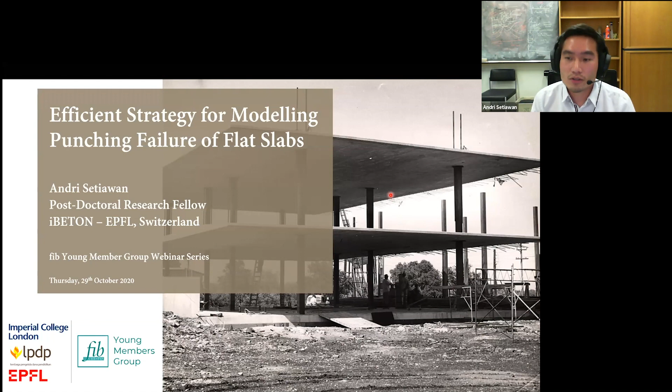The title of the presentation, as Vlad has already mentioned, is Efficient Strategy for Modeling Punching Failure of Flat Slabs. For today's webinar, I've divided the section into several parts. First, I'm going to present the research background in a very general way, and then the research aim, the objective of this research. Then we move on to the state of the art about punching shear itself and about numerical modeling in general. Finally, in the fourth part, we move into the main contribution of my research, related to the proposed modeling strategy.

I also divide them into two parts. The first one is the implementation and verification. The second part will be about the extension of the model to deal with several practical design scenarios. And lastly, the conclusion and future work.

For the background and research aim, I'll take some minutes to cover everything, because I designed the presentation and slides to serve as general information for a general audience who are not familiar with either punching or numerical modeling. So I will spend some time there.

For the research background, I'm going to start with what is a flat slab building and what is the punching shear phenomenon. Flat slab building is a structural system where the floor slabs are directly supported by the columns without the presence of beams or girders.

This kind of structural system is widely used in Europe, especially in countries with low seismicity risk, because it offers many practical advantages, including minimizing the floor-to-floor height since you don't need beams, so you end up with more floors at the same total height. Also, without beams, you get simpler reinforcement installation, which speeds up the construction process, and it gives more freedom for architects to lay out the building. And lastly, faster construction time.

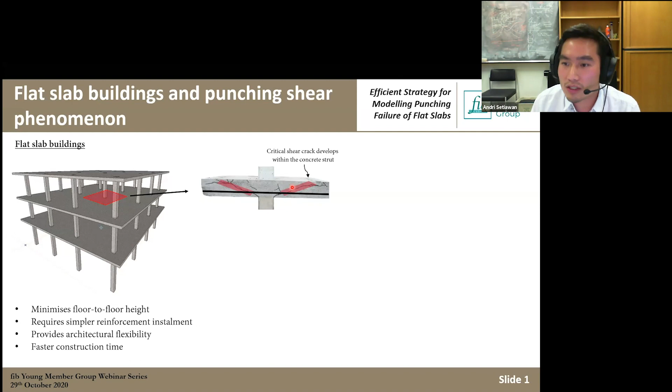In the worst case scenario, found in most typical older flat slab buildings where there is no continuous bottom reinforcement, we can have what is called progressive collapse, where the slab is fully punched through the column. It's a very dangerous failure mode because it happens in a very brittle manner and doesn't give any time for occupants to evacuate the building.

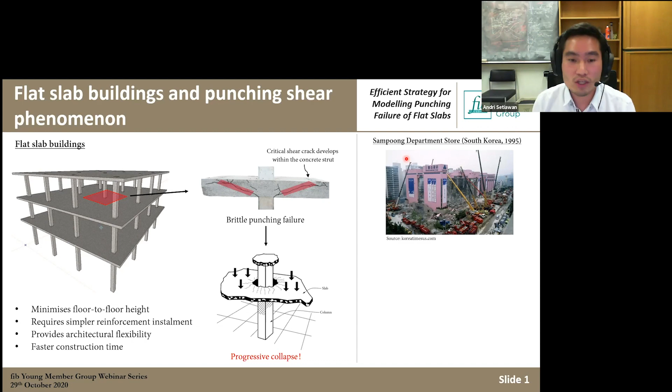We have seen this from previous incidents, like the well-known failure of the Sampoong department store in South Korea in 1995, which was a full collapse. Another example happened during the Northridge earthquake in 1994 in California — this is a picture of Bullock's department store, which partially collapsed during the earthquake.

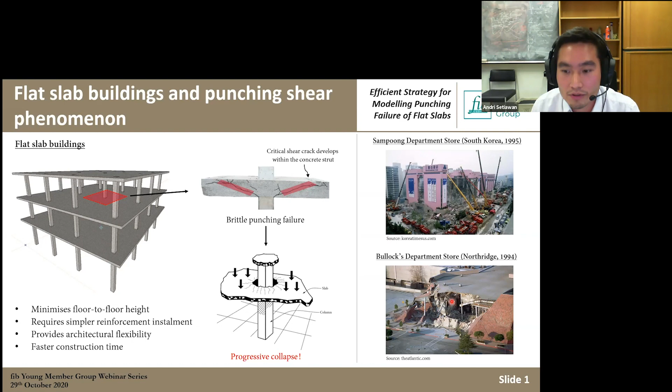Moving on, we'll discuss a little bit about the current code of practice and the kind of simplifications and assumptions that design codes typically use.

Before discussing the codes, I'll explain the typical test setup we use in the lab to study or investigate punching. This is the configuration of an actual continuous flat slab system, where you have the hogging moment, or negative bending moment, around the column region, and also a positive sagging moment.

However, testing these full scale slabs in the lab would be very expensive and take a lot of space. So what most researchers did in the past was cut the slabs to only investigate the hogging moment region — cutting along the border of the contraflexure line, resulting in what we call an isolated slab, giving a smaller scale specimen.

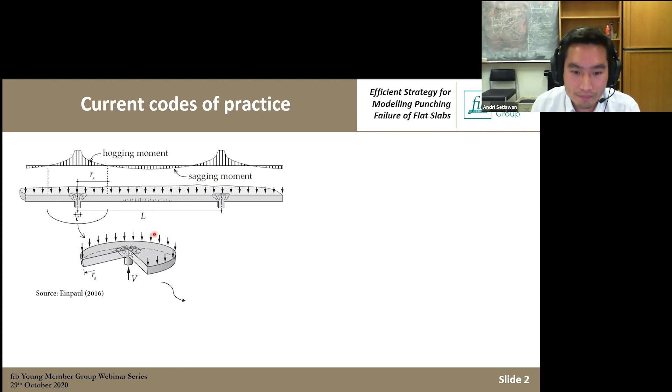This is, for example, a typical slab test done many times at EPFL. Just to give you an idea, the dimension of the slab is around 3 meters by 3 meters, and the thickness is around 250 millimeters. This typical isolated slab represents an actual slab with a span of around 6.5 to 7 meters.

And in typical codes of practice, they also derive their formulation mostly based on this isolated situation. So what we use in practice is that we have the column in here. For example, for Eurocode, we have a control perimeter located at 2d away from the column. And what we do is calculate the resistance along this control perimeter, and we check that resistance against the shear stress calculated along the same perimeter.

For Eurocode 2, there are 3 parameters that we consider: the concrete strength, the reinforcement ratio, and the size effect. And it was fully empirical. For ACI, it is similar, but the control section is closer to the column. It is 0.5d, and it is only governed by the concrete strength. And it's also empirical. And for Model Code, which is written by the fib, it's similar to ACI.

It assumes the control perimeter to be at 0.5d from the column, but it is a mechanically based, or let's say rational model, which considers many parameters like concrete strength, yield strength of the rebars, reinforcement ratio, size effect, slenderness, and aggregate size. I will discuss the derivation of the Model Code, which is employed in my model, in more detail later. But what I want to emphasize from this slide is that this approach of having a control perimeter is very practical and easy to implement for design practice.

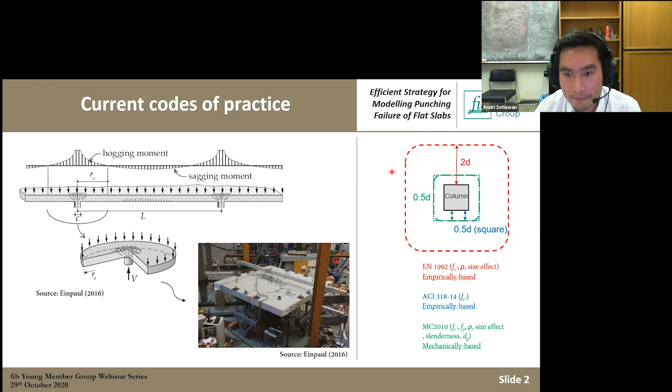So in these typical isolated slabs, we neglect many contributions in real slabs that actually contribute more to the punching resistance. So I'm going to discuss a bit about major parameters that were neglected when deriving this isolated situation. The first one is moment redistribution. We know that in reality, we also have positive moment in the midspan. And this positive moment is not captured in the typical test with isolated slabs. So this will also contribute to increasing the punching resistance.

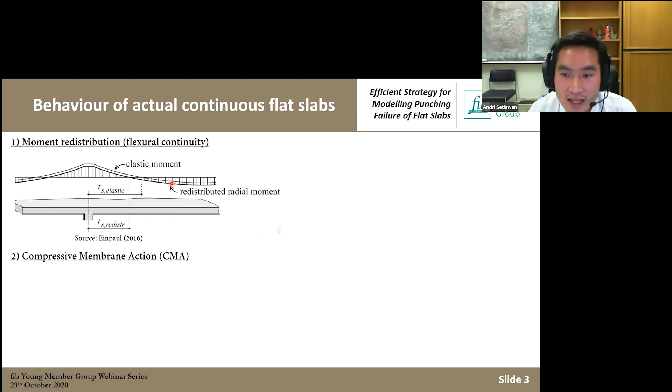The second thing is compressive membrane action. Imagine that when the inner part of the slab inside the hogging region starts having cracking and yielding of the bars, the slab would expand laterally, whereas the outer part of the slab is still not fully cracked, for example. So the outer part would provide a natural confinement to the inner part of the slab, which actually increases the resistance. It is similar to having a natural pre-stress in the inner region. So this is also not explicitly considered in the design codes.

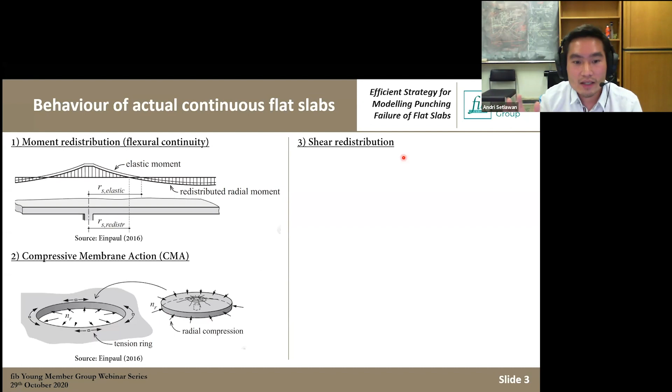And the third aspect is the shear redistribution. In most design codes, we assume that punching happens when the maximum shear stress is reached. But in reality, for example, this is a very nice study by Sagaseta et al. showing that when you have slabs with different reinforcement arrangement, or slabs that were loaded in a one-way fashion, not in two-way, you can see here that the maximum rotation and minimum rotation are not the same. So for example, if you load the slabs in this direction, you will have the maximum rotation higher in this part and lower in this part. So you can have more resistance on the side where you have minimum rotation. So this is also contributing to the increase of punching resistance.

The last thing is the post-punching resistance. We know that when the slab is fully punched, the remaining resistance is contributed by the integrity reinforcement, which is basically the reinforcement that is installed continuously through the bottom region of the slab. And it will activate what is called tensile membrane action, or you may call it catenary action. And this will help the failed connection to regain resistance. You can see in this test, after punching, due to the activation of the integrity reinforcement, we can achieve a resistance that is close even to the pre-punching resistance. And this is very beneficial and very important when we have a progressive collapse scenario. We can prevent the spread of the progressive collapse by having this tensile membrane action, for example.

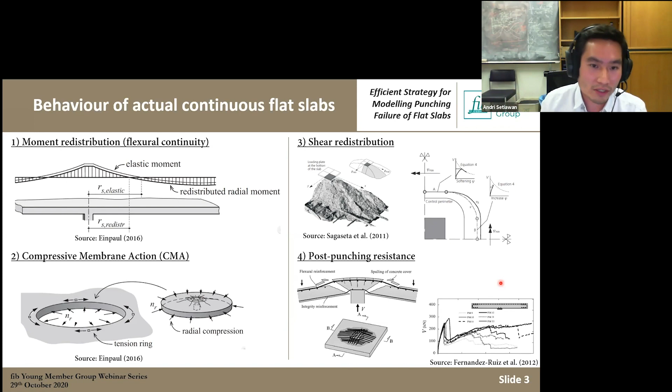So in general, we can divide the modeling into two parts: the 3D solid modeling approach on the left, and the 2D shell modeling approach on the right.

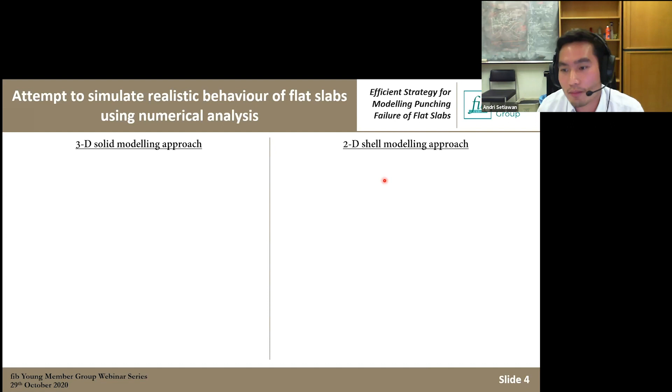For the 3D solid modeling approach, the advantages are that we have a realistic stress state everywhere, out of plane and in plane. We can have accurate representation of force redistribution, both moment redistribution and shear redistribution, and we can also model post-punching explicitly by modeling the bar as a solid element within the slab.

However, there are several disadvantages as well, because you need to mesh the solid elements through the thickness. We end up with a large number of elements and degrees of freedom to solve, so we are really inefficient in terms of computation time. That makes this approach mostly suitable only for sub-assemblages or a small portion of the building. Lastly, the failure criterion is a little more complex than 2D shell because you consider the interaction in the three-dimensional problem.

For the 2D shell modeling approach, we assume that the out-of-plane stress is negligible, so we can only model the slab as an XY plane - like just a paper, basically.

The advantage of the shell modeling approach is that, because of the rotational degree of freedom at each node, we can have fewer elements. We do not need to discretize through the thickness of the slab, so we can have more efficient computation time. Because of this, the 2D shell is more suitable for large structures. For example, if you want to model a whole building, 2D shell is still possible, whereas with 3D solid it would be a nightmare.

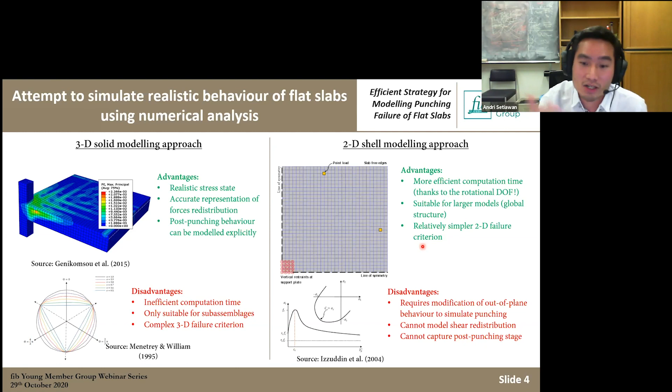So in my research, we are trying to improve the performance of the 2D shell modeling approach to overcome these disadvantages, so we can end up with a model that is efficient but also sufficiently accurate to simulate punching like a 3D solid. That's the big dream at the time.

So the research aim is to develop an efficient modeling strategy to simulate punching failure, and the keyword is that it is suitable to analyze large structures. Of course, we can only do this by modifying the 2D shell.

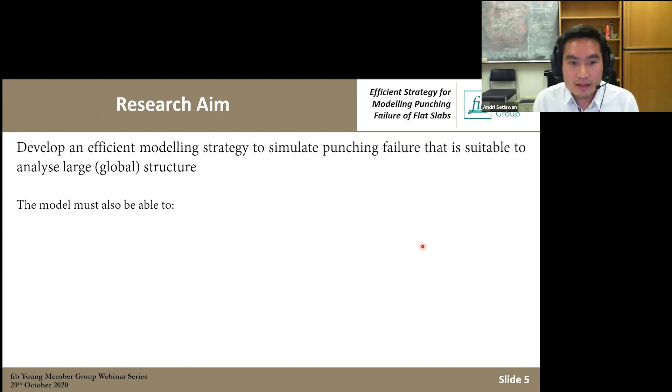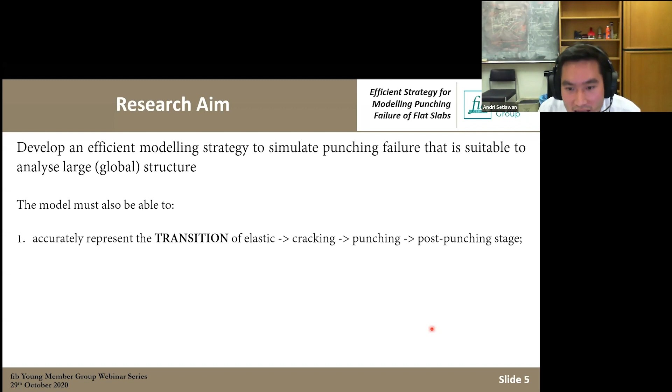But the model we want must also be able to - and I put an underline and bold there - accurately represent the transition from elastic, cracking, punching, and post-punching stage. It must also be able to realistically capture the presence of shear redistribution that happens in reality.

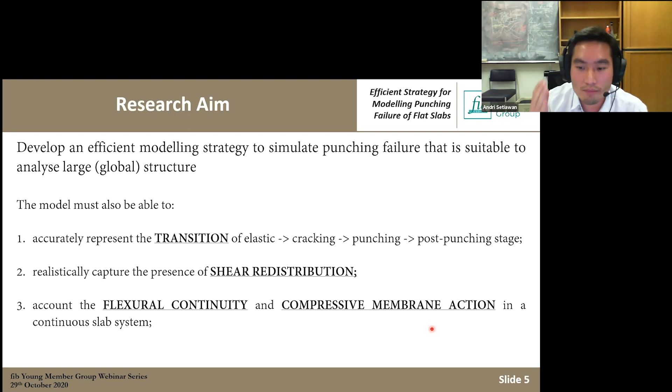And since we want to use this model for actual continuous slabs, it needs to take into account flexural continuity and compressive membrane action. Lastly, it needs to be numerically robust so we can ensure numerical convergence. That's the research aim, the big dream of that time.

So for the state of the art, I'm going to review previous attempts by other studies that tried to modify the 2D shell. Of course, I'm not the first one in this topic - many researchers have done this before. I will try to categorize the strategies people have employed before me to modify the 2D shell element.

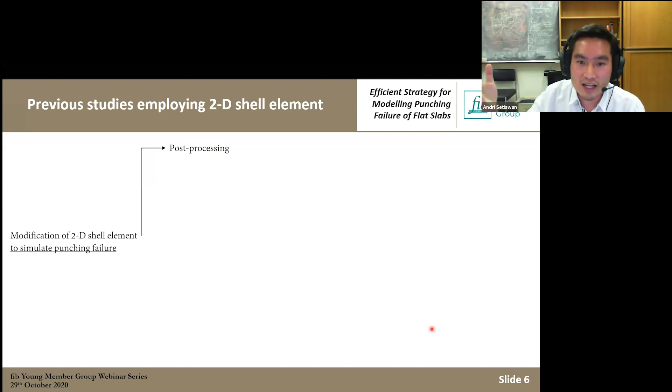The first category is the simplest one: post-processing, which means you use nonlinear shell analysis to produce the load-rotation response without any shear failure, and then intersect it with the failure criterion. For example, the study from Belletti et al., and Shu et al., used the critical shear crack failure criterion to detect failure - the intersection between the failure criterion and the curve is the failure point. That's the simplest approach, post-processing.

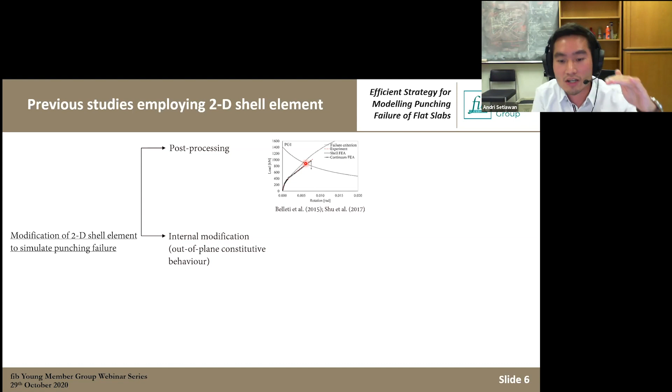The second approach, which I call internal modification, is done by modifying the out-of-plane constitutive behavior. Instead of having an elastic out-of-plane shear response, you modify it to consider nonlinearity as in 3D solid. This was done in studies by Polak, and also Hrynyk and Vecchio, where they modified the out-of-plane response of the slab.

And the last category I call external modification, because we do not do anything to the shell, but we put additional elements, which we call connector elements. You can see here that the slab is modeled just as a normal slab, but then you put a connector element around the punching perimeter.

So that the punching failure is triggered locally by those connector elements. But this approach by Keyvani and Liu has some limitations, because they do not consider shear distribution, so they trigger failure as soon as the first connector fails. The shear capacity of the connectors was predefined before the analysis, so you cannot really consider how membrane action changes the resistance. The third thing is the post-punching capacity was not explicitly modeled.

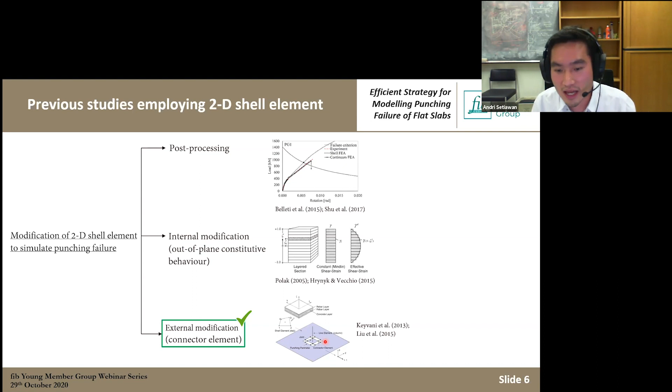So we think, okay, we can start doing something like external modification, as was done by Keyvani and Liu, but we want to provide an alternative to their shortcomings. The first question at that time was what failure criterion to employ when using a connector element. The prediction of our model is solely governed by the accuracy of the failure criterion, so we need to be careful when we select the failure criterion to apply in our model.

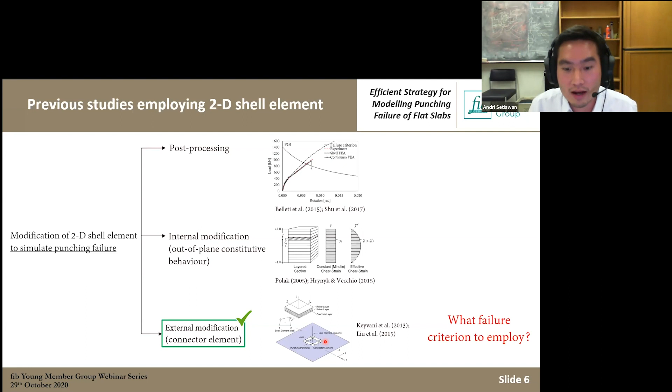So the next slide will discuss a brief overview about the many different failure criteria that are available for the analytical approach to predict punching. Just for the sake of completeness, I'm going to show you all the categories.

We have the flexural capacity model. We have the plasticity-based model, which models concrete as a plastic element with a reduced concrete compressive strength, the effective compressive strength. We also have the fracture mechanics model. And the last one is what is called the kinematic model, which has two derivations: the strain-based model and the critical shear crack theory.

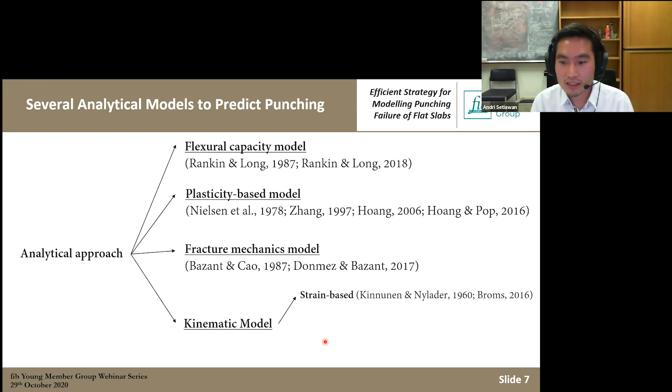So after reviewing all these models, we based our choice on three different criteria. The first is accuracy - we want a failure criterion that is accurate. The second is versatility - we want a model that can be used for slabs with shear reinforcement, without shear reinforcement, with fibers, or with a pre-stress force, for example. The last one is the model needs to be compatible with finite element analysis. I will let you know later what that means.

This theory assumes that the load transfer mechanism, transferring the load from the slab to the column, is disturbed by the presence of diagonal cracks propagating inside the concrete strut. The ability of these two crack surfaces to transfer shear from the slab to the column is governed by the crack opening - the width of the crack - and also the roughness of the crack, because you need to activate aggregate interlock in between.

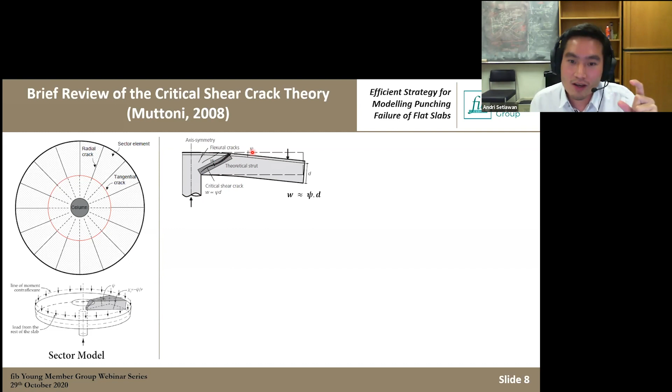For the crack width, it is assumed that the width of the crack can be approximated as a function of the flexural deformation. This is a very nice model because you are coupling both flexural behavior and shear, since the bending rotation is mostly flexural. So we can say that when you have larger rotation due to bending behavior, you also have less resistance because you have wider crack opening.

So as I said before, the model couples the flexural and also shear behavior. We do not really need to separate those two, or check whether it's a flexural mechanism or a pure punching mechanism. We can combine both in this formulation.

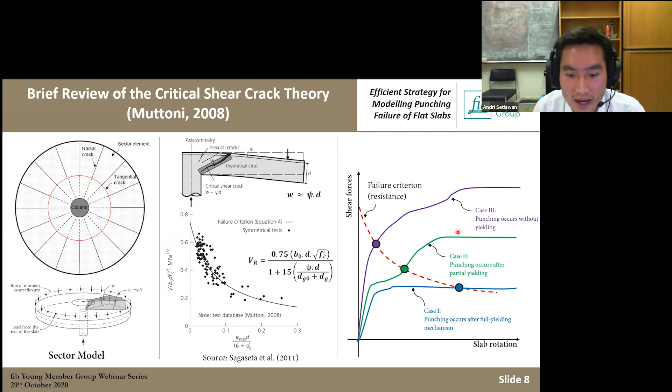The derivation is long, but I'm just going to give you an idea. The critical shear crack theory assumes two major things: the first is the crack geometry and crack kinematics, and the second is the shear transfer mechanism and the constitutive law that governs this transfer mechanism.

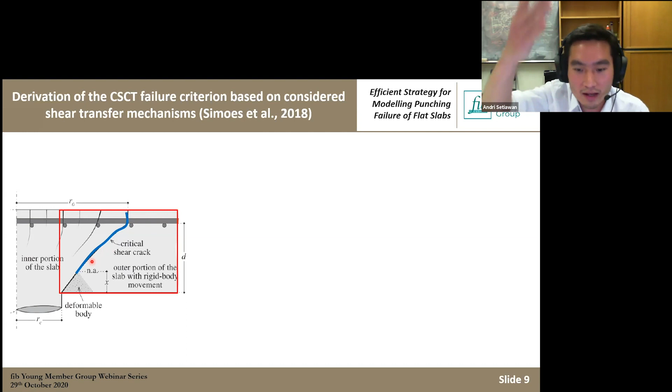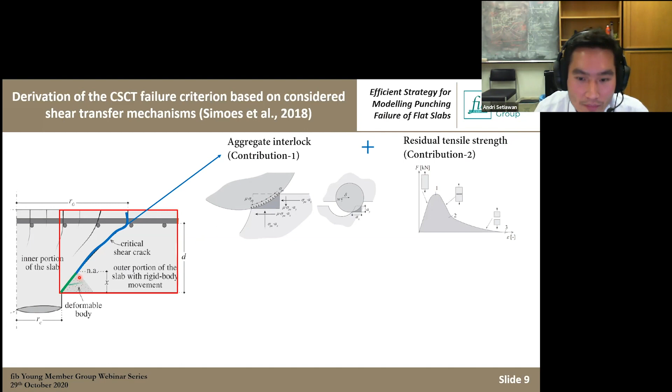So we see here the critical region where we have punching. This blue region is the discrete crack, which is basically crack that occurs above the neutral axis. Here we have the contribution of aggregate interlock, and also the contribution of residual tensile strength — I call these contribution 1 and contribution 2. Then in the compression zone, we have shear carried by the concrete compression zone, which I call contribution 3. And the last thing, we also have contribution from the dowelling of the flexural bars.

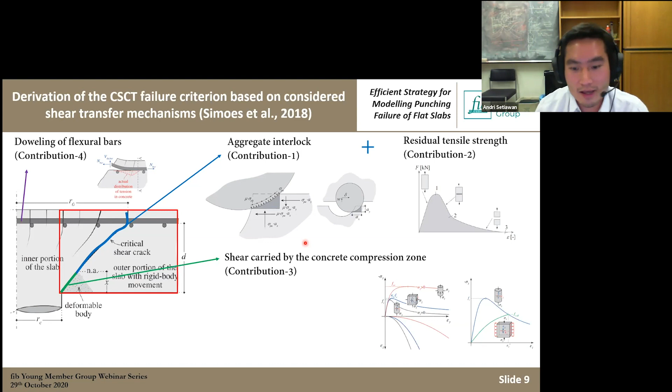So for a certain crack opening, knowing the crack displacement and crack sliding, you can calculate the contribution of each, and then integrate them along the assumed crack surface to get the resistance. You do this for the next crack opening, and then you get the failure criterion. Basically, the punching resistance is simply the integration, or total, of each contribution along the critical shear crack.

So for those of you who are interested, you can refer to Simoes et al. studies, which completely describe this derivation.

So now we are moving on to the proposed modeling strategy, which is basically combining the advantages of the shell element, which is efficient, with the failure criterion from the critical shear crack theory. We call it a joint-shell punching model, combining joint and shell. The idea is that we have the shell to tackle the bending behavior, whereas the joint takes care of the punching failure.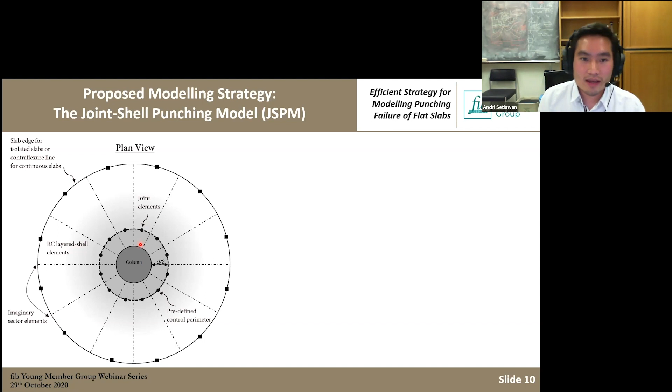As I said before, we use shell elements to model the bending behavior. Then at a certain location close to the column — in this case we assume punching happens at half the effective depth from the column, to be consistent with the critical shear crack theory — we put joint elements. These joint elements will trigger the failure around this perimeter. So as you can see from the name, this combines joint and shell.

For the shell, you can typically use any shell formulation — it doesn't really matter which constitutive model you use, but the most important thing is that you need a model able to capture rotation accurately, because the critical shear crack theory assumes that the resistance is directly governed by the rotation. So the accuracy is dictated by how accurately your shell captures the rotation.

For example, in this work, I'm using the shell formulation proposed by Izzuddin et al. We are using the Reissner-Mindlin shell type, where plane sections remain plane after deformation, but not necessarily normal to the mid-surface of the slab. We consider shear deformation, and we use a layered approach, discretizing the shell into several layers through the thickness. We model the reinforcement with a smeared approach, as a layer with an equivalent thickness. We also have a concrete biaxial model to consider the interaction of compressive, tensile, and shear behavior in the in-plane direction.

So the second part is where the novelty comes from, which is the joint formulation. The joint itself is, I would say, quite unique. The joint consists of 4 nodes — you can see in the figure, node 1 and 2, node 3, and node 4.

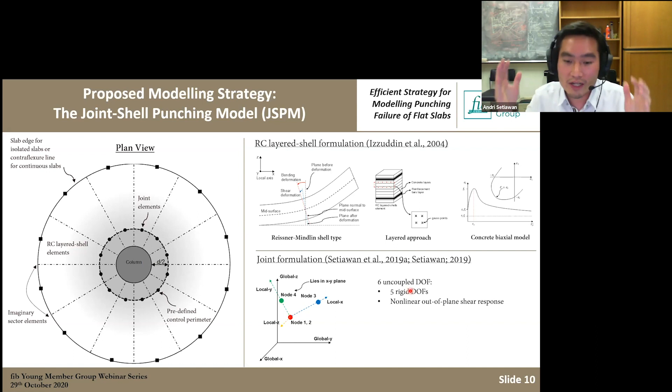I will explain to you one by one what is the function of each node. This joint has 6 degrees of freedom, 3 translation and 3 rotation. We assume that all the other 5 degrees of freedom, except the out-of-plane shears, are rigid, so we ensure compatibility of the shell itself.

But for the out-of-plane, we impose a certain constitutive behavior in order to capture punching. It's like a 1 degree of freedom joint spring at the end. So let me go back to the picture. This is the position of the first and second nodes. At undeformed configuration, the first and second nodes coincide. When punching happens, they will separate from each other, simulating the breaking of the concrete.

Now you probably ask why you need node 3 and node 4. Node 3 is not a structural node, it's like an imaginary monitoring node. For example, I put node 3 along the contraflexure here, and node 4 I put in the axis of the column. So node 3 is at the contraflexure and node 4 is in the column. I use node 3 to inform about the absolute slab rotation at each step, whereas node 4 is to monitor the column chord rotation.

If we subtract the rotation from node 3 and node 4, we can get the relative slab-column rotation, which is used by the critical shear crack theory to calculate the resistance. So the idea is that every load step, these two nodes, node 3 and node 4, will monitor and save the rotation, and then I can subtract them internally in the algorithm to check the remaining resistance at that current step, and determine whether punching has occurred or not. So it's an iterative scheme.

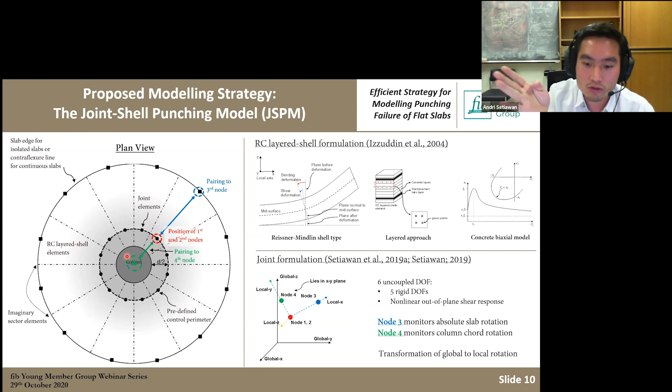Node 3 and node 4 are also required to do a transformation of the global rotation, because in finite element, the rotation we capture normally is rotation in the global direction, X and Y. But in this scenario, we need to transform that into a radial rotation, which is basically the rotation that controls the opening of the tangential crack. So we need those two nodes to transform the rotation.

So the algorithm, I'm not going to show you any complicated or sophisticated script, it's just a very simple schematic drawing. The algorithm has three major components, as any algorithm does: the subroutine input, the decision-making process, and the subroutine output. In the subroutine input, we store data from the main analysis program to the subroutine, and then in the subroutine output, we give back the results from the subroutine to the main analysis.

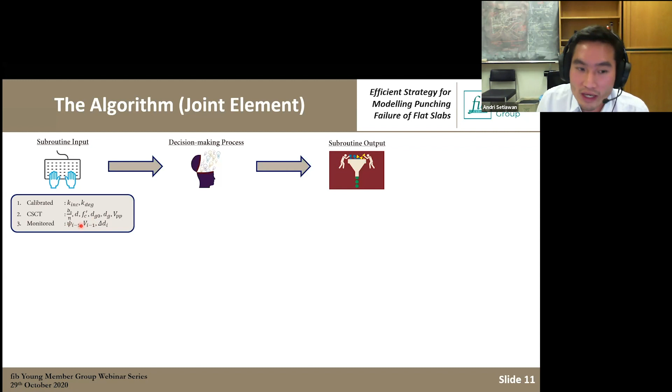For the subroutine input, there are three different inputs: the calibrated parameters, the critical shear crack theory parameters used to produce the criterion, and most importantly the monitored parameter, which is the rotation at the previous step and the shear at the previous step. By comparing these two, we can see whether failure has happened or not, and also the displacement, so we can calculate the stiffness at each step.

Now the second stage is that the shear force in the joint has already become larger than the critical shear crack criterion, so you have failure. But now we need to ask the joint element: did the failure happen at all joints or only at one joint? Why do we need this? Because we want to consider shear redistribution, which happens when one joint fails while some of the other joints have not failed yet.

So for the joint that has failed, the resistance will reduce, whereas at the same time, the shear will redistribute to adjacent joints where the failure criterion has not been intersected. So that's the idea of how we can simulate the redistribution.

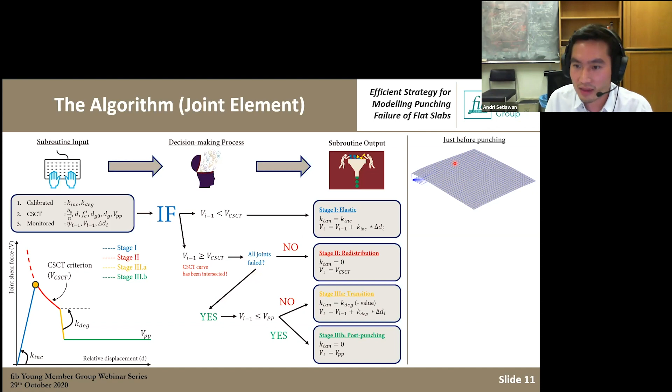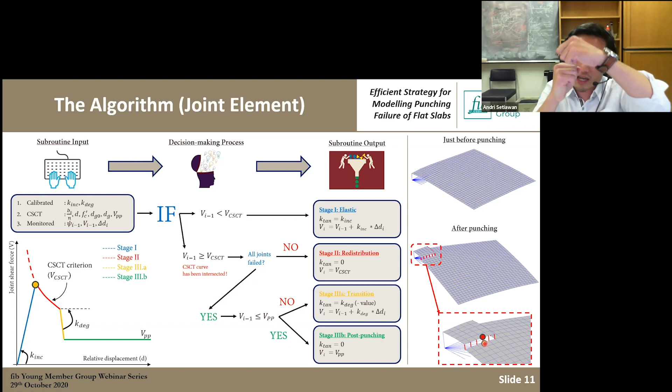So this is the physical illustration. Just before punching, you can still see that the slabs are intact between the inner and the outer part here. They are still intact. But then just after punching, if we zoom into this region, we see that the red dots and the yellow dots are actually representing the first and second nodes that start to separate because of the punching failure that has triggered there. So this is how the model simulates the physical failure here.

So now we are trying to implement this algorithm into a finite element framework, using an in-house structural analysis software from Imperial College London called ADAPTIC. We wrote the subroutine and then implemented it in this program.

So this is the typical EPFL test, and I just cut the slab into a quarter by utilizing the symmetry condition. We have the line of symmetry here, the support modeled as restraint, and as I said before, at a predefined control perimeter we have joint elements distributed uniformly there. So we apply the point load here.

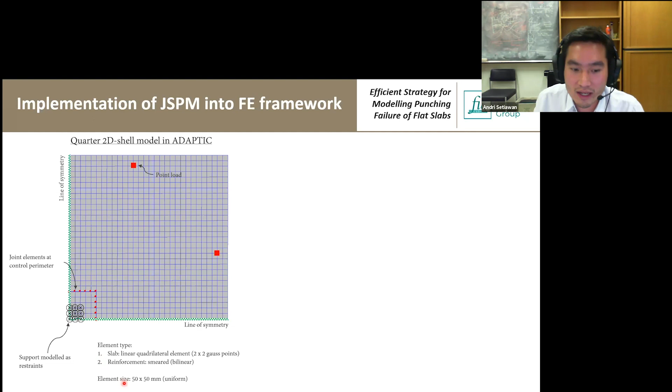We are using quadrilateral elements and a smeared approach for the reinforcement, and the element size is typically around 50 by 50. This is a little finer than usually used in shell elements, but we need several joint elements along the control perimeter. So actually the element size is dictated by how many joint elements we want to have, because if you want to simulate redistribution, it's better to have more joint elements.

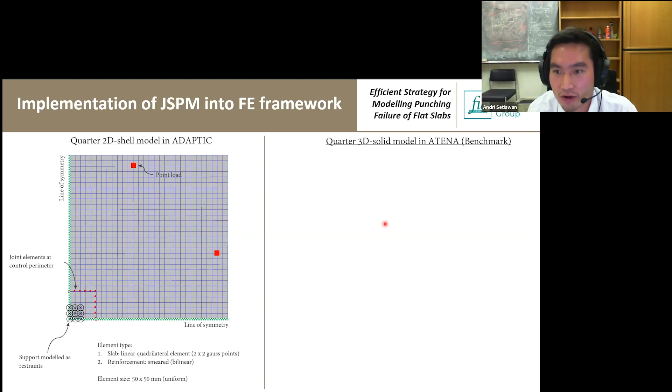And for the benchmark, we also did some analysis in a commercial finite element software called ATENA, from Cervenka Consulting. This is the same slab modeled in 3D solid elements. We have the line of symmetry, and the support modeled as a 3D elastic steel plate. We also mesh the slab through the thickness with 10 elements, which gives sufficiently accurate bending behavior, along with the point load and the loading plates.

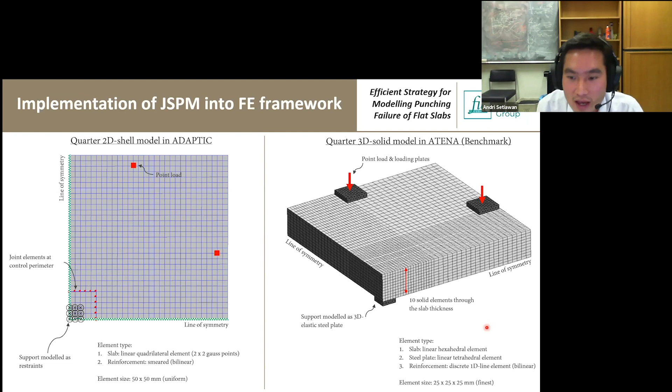So you can see we use linear hexahedral elements, linear order, and linear order tetrahedral elements for the steel plate. The reinforcement is modeled as a 1D truss element, and the element size is around 25 by 25 by 25 in the region where the shear stress is governing.

So now we are moving on to the initial verification that I did with this model. I divided the screen into 4 parts because I'm going to show 4 different cases. The first case is a concentric punching test with a large, deep slab.

This was, I think, the largest slab tested at EPFL, with a dimension of 6 meter by 6 meter by 500 millimeter thick. We can see in the graph the black curve is the test, and the red curve is the model we developed. The load rotation response is captured nicely, including the occurrence of punching. Because the failure criterion we employ already considers size effect, we are able to capture the punching of these large slabs accurately.

In the second scenario, we are trying to investigate the ability of this model to capture post-punching. This was also a test from EPFL, from Fernandez Ruiz et al. 2013. We can see on the right that we are not only capturing the punching load accurately, but also the post-punching resistance quite nicely, I would say.

In the third scenario, we are trying to simulate some slabs with compressive membrane action, so that we can validate whether this model is capable of simulating continuous slabs or not.

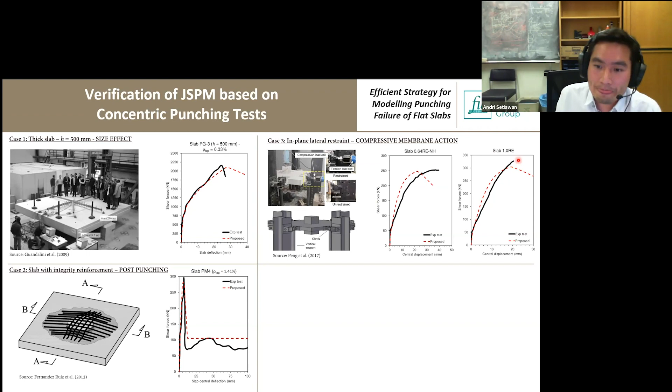The last one is the slab with flexural continuity. This is a quite unique test setup where we have isolated slabs, but with a steel frame system that introduces a sagging moment. So instead of only a hogging moment region, with this test setup you also have a sagging moment along the edge. We are testing two slabs with different reinforcement proportions in the midspan and in the end span, and we are able to capture both scenarios accurately, both the load rotation and the failure, which means we are capturing the moment redistribution accurately in the model.

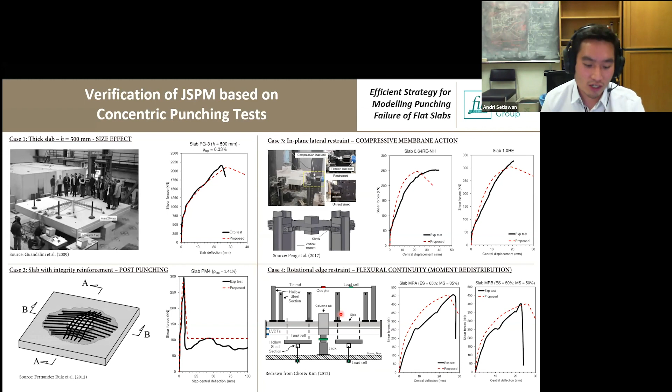The last test we do is to capture shear redistribution. To show this, we use a study case from slab PT34 of Sagaseta, which was loaded in one-way bending. This is the slab, a quarter of the slab. It has the same reinforcement arrangement in X and Y, but it was only loaded in the Y-axis at this loading point, as you see on screen.

So we can imagine that for these joint elements here, this will be weaker because the rotation in this part will be less, the rotation will be higher, which means the resistance will be less. Whereas in the yellow part of the joint, we have smaller rotation, which means the shear resistance will be higher. With this study case, we want to show how shear force can redistribute from the red dots to the yellow dots.

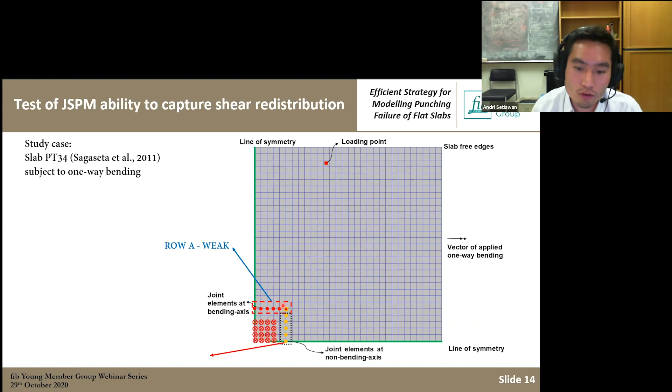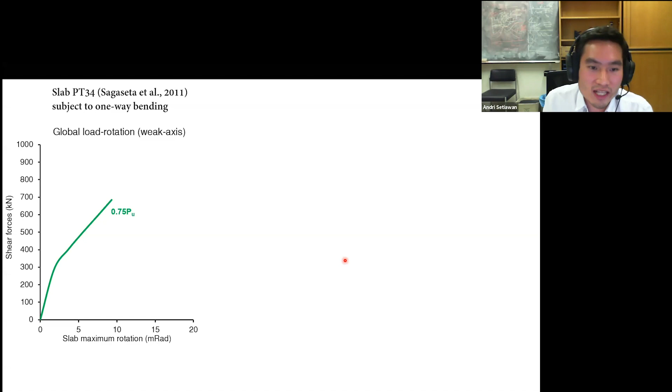So these are the results. We try to relate what happens in the global behavior and also what happens in the local behavior of the joint. In the figure on the left, we see the global behavior of the slab, with shear force on the y-axis and slab maximum rotation on the x-axis. For the first stage, we are loading the slab until 75% of the predicted failure load.

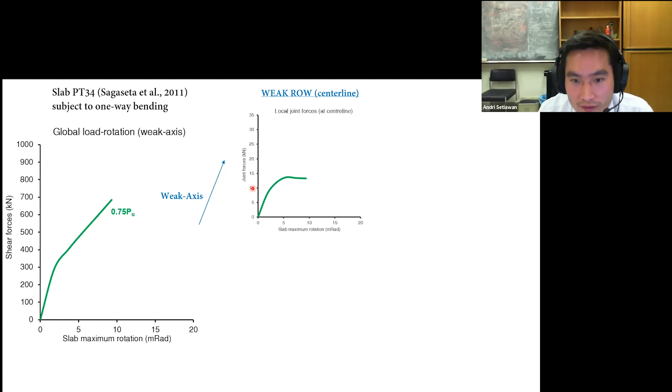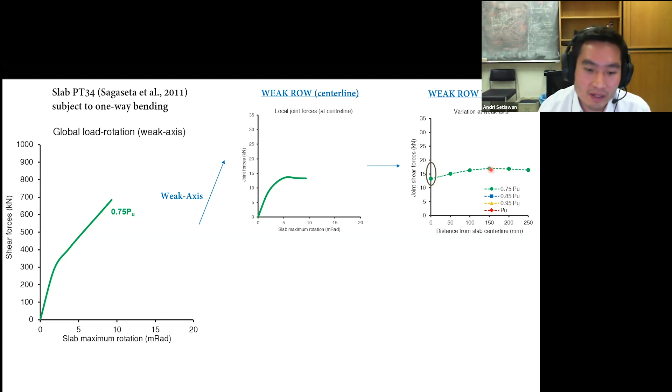Now we investigate the response of the local behavior of the joint at the same level of load. The first part is the joint at the weak axis, located at the center line, basically the symmetric line. Here we see the joint force and the slab maximum rotation - the joint force increases here until around 15 kilonewtons. The next figure shows the variation of joint force along the weak axis. This joint represents only one dot here, and the other dots represent the joint force at different joints along that axis.

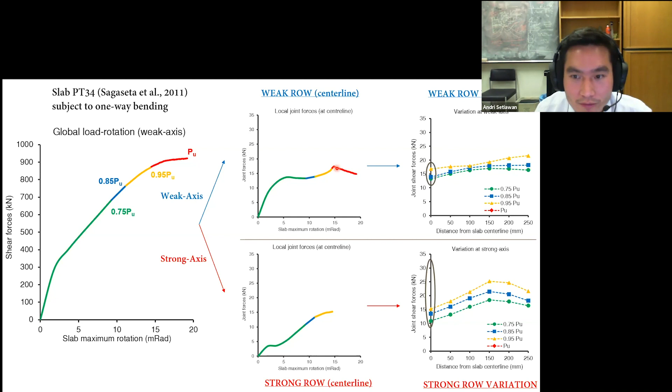But now we can see in the weak axis, the joint force has softened - this part has failed locally. In the right figure, the red dashed line is actually lower than the yellow dashed line, which means all of the joints here are already in the softening part. We expect the joint in the strong axis to take over the forces, and yes, it does. The joint at the strong axis takes care of the load redistributed from the weak axis. We can see nicely that the joint at the center line, which has the smaller rotation, at the end of the failure load has the highest portion of the force because its resistance was highest at the end.

So we are showing with this illustration the evolution between joint forces and the global behavior, which satisfied our objective to consider shear distribution. We see the softening here, the arrow you see, and also the increase of joint force at the strong axis, and also a complete redistribution here.

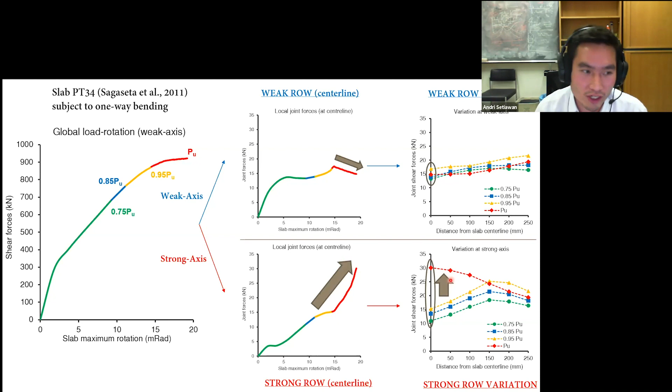Now for the extension of the model, I'm going to briefly discuss it. We did 3 different extensions. The first deals with slabs supported on rectangular columns or walls, like long columns and walls. The second deals with slabs subjected to eccentricity, with monotonic and cyclic eccentricity. The last one deals with slabs with shear reinforcement. I'm going to present each extension in one slide.

For the extension of slabs supported on columns and walls, the difference is that when you start having a rectangular or long column, the shear stress becomes less and less uniform. You can see in the left figure a typical scenario where C is the column size and D is the effective depth of the slab, and they are equal. This represents a uniform stress typically modeled in the previous stage of the verification.

Moving to the right part, we have a larger square column or an elongated column, where the shear stress concentrates more on the corner region and a minimum shear is carried by the middle region. This is very typical in practice, for example with a partition wall or core wall where slabs are directly supported by the core wall. We see a region with concentrated two-way shear and a region with minimum one-way shear. This happens in both scenarios: two-way shear around the corner and one-way shear along the outer part of the region.

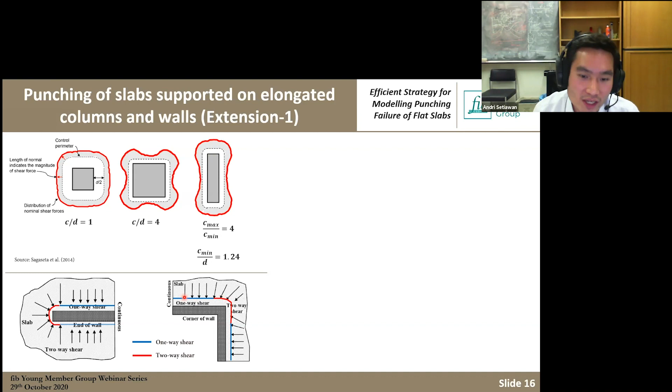So what we do here is distinguish the contribution of the two-way shear in the punching region and the one-way shear in the outer part region. But we don't know at the time what the border is. How can we define a border separating the one-way shear and two-way shear?

So we did some comprehensive 3D solid analysis. I modeled a slab like this with a rectangular column from the real test, and we extract the variation of shear forces along this control perimeter. We have 4 regions: the shorter side and diagonal, where we expect higher shear stress, and the longer side and the discounted region.

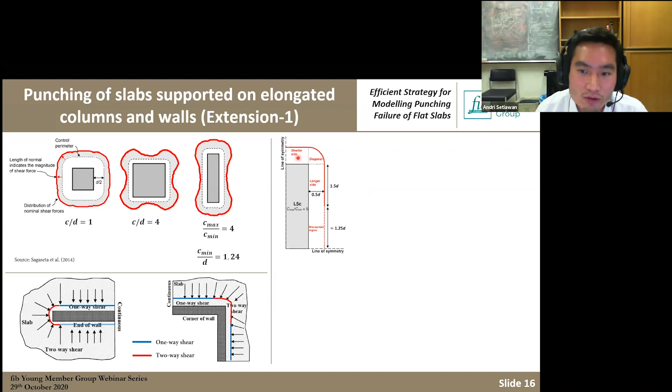The 1.5D that we define here is compatible with the model code suggestion that if you have a very long column, you need to neglect this region, so that when considering the resistance of punching, you only consider the 1.5D from the column. We tried this assumption and it matches quite well with the actual distribution. The majority of the load is carried by the longer side, diagonal, and shorter side, and only a minority of the forces is carried by the discounted region.

When we do the integration - the dot here represents the line of symmetry, and this one represents the shorter side. When we integrate the force, we found that 90% of the load is carried by this two-way region, and only minimum shear is observed elsewhere.

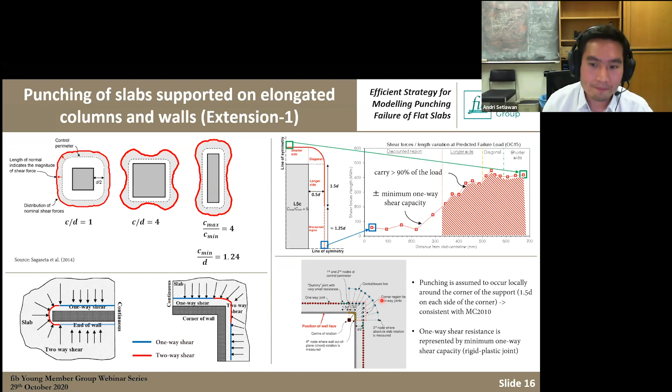So we modified the model with 2 assumptions: we assume that we only put punching joints along the corner, and then we treat the resistance of the one-way shear with a minimum shear resistance using a rigid plastic joint. So this is just a very brief overview of the extension that we did.

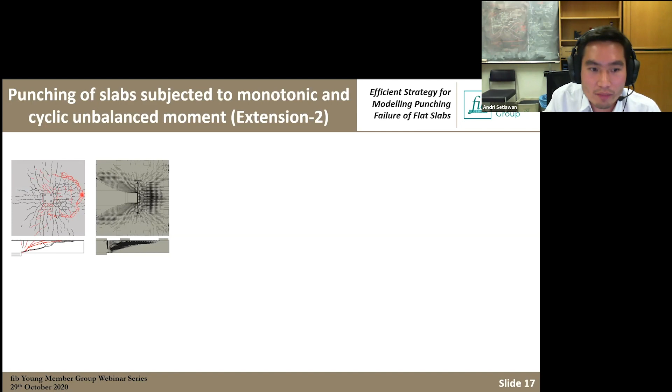For extension 2, for slabs with unbalanced moment, the situation is also different. This is the slab tested at EPFL as well. With a monotonic eccentricity, you can see the eccentricity goes to the right of the column, so the tangential crack actually only forms on one side.

We did some 3D solid analysis as well to confirm that. We can see that the principal strain, the maximum principal strain, which is tension, is concentrated only in the hogging region, where the shear stress from the unbalanced moment adds to the shear stress from the gravity load.

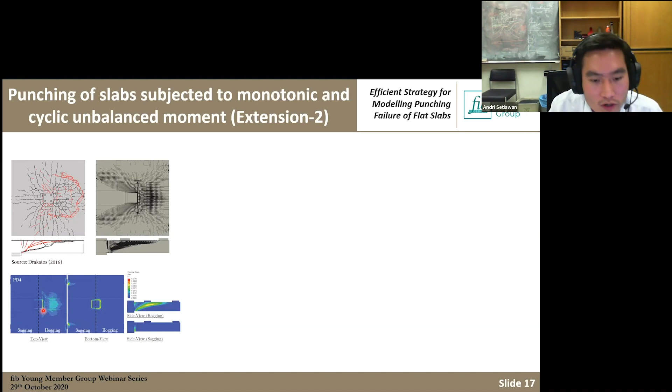So in this scenario, we cannot really redistribute the shear to the whole control perimeter because it's not physically realistic. So we need to make an adjustment on to what extent we are allowing the joint to redistribute. So this is what we do in a very brief way.

This is a sector element. We have hogging half here and sagging half here, or positive and negative. Eccentricity is going this way. You can expect the shear stress is higher here.

So what we do is that when we have a monotonic loading, we assume that the redistribution can only happen along the half of the slab, only along the hogging half. So when the last joint at the slab center line fails, we assume redistribution is done, because otherwise it will continue to redistribute to the sagging half, and in reality it won't happen because you need very ductile slabs to be able to redistribute to the sagging half, and it doesn't make sense.

For the cyclic one, because we know that with repetitive loading we have a plastic accumulation of rebar strain, the crack width will be higher. So the redistribution physically will be less. So what we did is we are limiting it, basically assuming no redistribution at all. So when the first joint at this red hatch region fails, we assume the connection has failed. This is how we distinguish the behavior of monotonic and cyclic of the slab.

So yeah, we did some simulation. You can see the black curve represents the test, the blue curve represents the prediction from ATENA 3D solid, and the red curve is the prediction of the joint model, which is quite accurate, I would say.

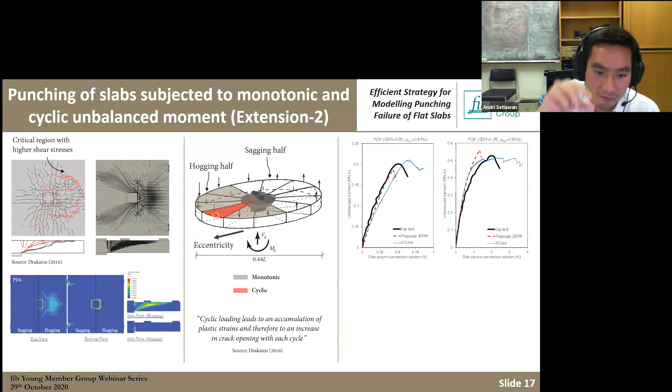So lastly, for the slab with shear reinforcement, we consider two different scenarios. The first mode of failure is when the critical shear crack intersects the shear reinforced region, and the behavior is more controlled by the yielding or straining of the shear reinforcement. We have this criterion already from the critical shear crack theory, so we can just add the contribution of shear reinforcement as a function of the rotation. This is pretty simple, to be honest, because the model is already available.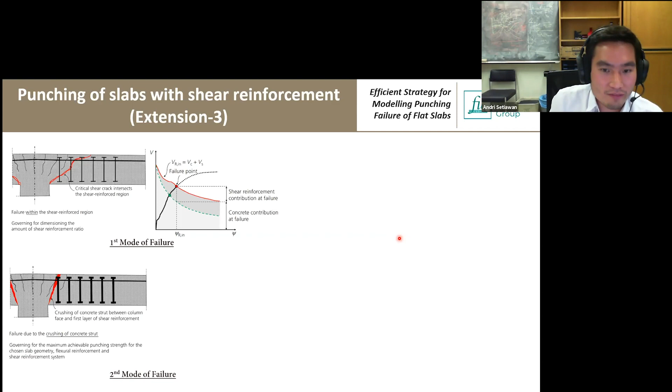The second mode of failure is when you have a large diameter of shear reinforcement with a narrow spacing, so the crack is not going to propagate into the shear reinforced zone. Instead, failure happens by the crushing of concrete at the inner face of the slab. In this scenario, we also have a criterion based on the detailing and anchorage condition of the reinforcement, the spacing, and also the concrete strength.

So we do the modeling. For the first one, it's the test of isolated slabs reinforced with headed studs. We model two different slabs. The first slab is PL11 with a lower reinforcement ratio, 0.23%. As we can see here, the black curve is the test, the dotted gray is ATENA, and the red curve is the model from our proposed approach.

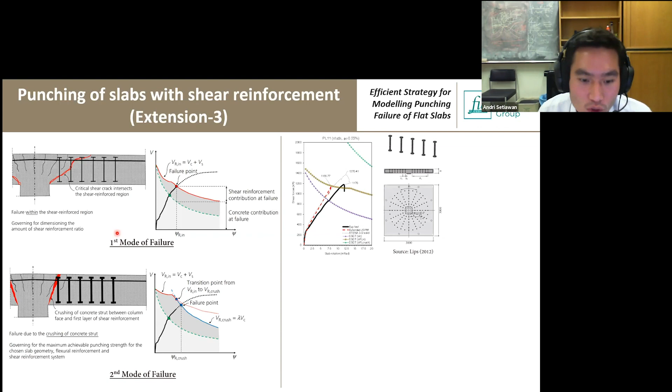We can see here that the criterion catching this failure is the inner one, which is basically the first mode of failure. This is consistent with the saw cut of the slabs after the test, where we see the crack cutting the shear reinforced region.

For the second scenario, we have PL7, where the reinforcement ratio is 4 times higher. In this case, the failure is governed by the crushing of the concrete. So interestingly, with this failure criterion, we are able to capture not only the punching capacity but also the correct failure mode.

The last test we did was a continuous slab tested by Chana and Desai. It's quite an old test from the UK, where they use one-leg stirrups. This represents a slab supported by the contraflexure region, so you have some continuity here, and positive moment. We can see that the red curve is the prediction and the black curve is the test results.

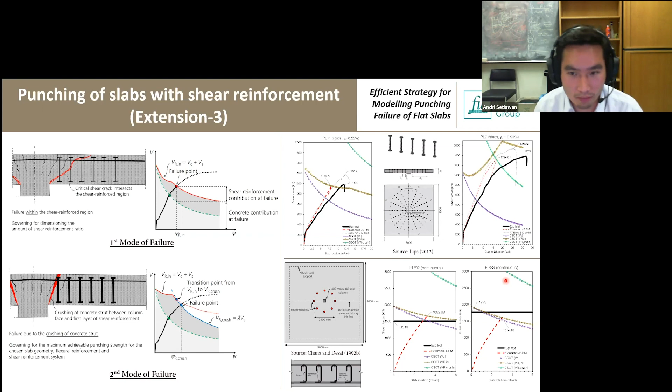So we can see that the prediction is also quite well and accurate. So just to conclude, we are doing all the validation. This is the summary of the accuracy and the variation of the prediction.

I'm going to present the mean and coefficient of variation of the joint shell punching model we did. In the graph, the y-axis is the measured divided by the predicted capacity. It will be equal to 1 if it's exactly the same as the test. For the original JSPM, the initial verification, we did 33 specimens with an average of 1.033 and variation of 9.4%.

The second scenario is with large column or wall support area. We simulated 24 specimens with an average of 1.025 and variation of 8.6%. For the slabs with unbalanced moment, both monotonic and cyclic, we simulated 21 specimens with an average of 0.977 and variation of 8.3%.

Lastly, for the slabs with shear reinforcement, continuous and isolated, we simulated 12 specimens with an average of 1.006 and variation of 7.3%. So we are really satisfied with the model because the average is very close to 1 and the variation is less than 10%.

Most importantly, we also compared the required computation time for the same slabs between our model and the 3D solid model, just to make a distinct comparison. For the joint shell punching model, for a typical slab, we only have 961 nodes, whereas for the same slab modeled using ATENA 3D solid, we ended up with

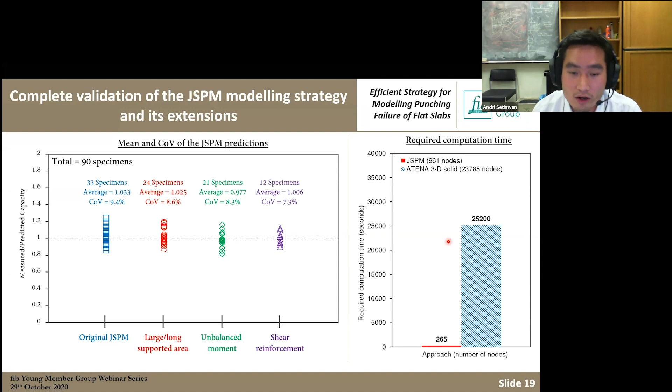23,785 nodes. And this is the required computation time, 265 seconds, which is basically 4 minutes or so. The ATENA solid, of course, has more nodes and degrees of freedom, so it takes almost 100 times longer to finish the simulation.

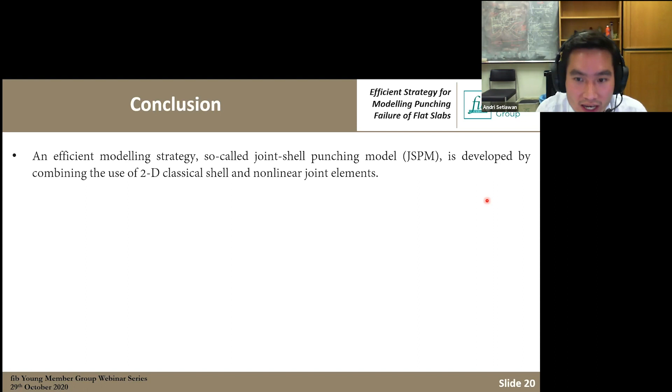So to conclude, we are developing an efficient modeling strategy. We call it the joint shell punching model, the main idea being combining the use of 2D shell and nonlinear joint elements. We have sufficiently proved that JSPM captures the elastic, cracking, punching, and post-punching stages reasonably well. We can also take into account shear redistribution, flexural continuity, and compressive membrane action.

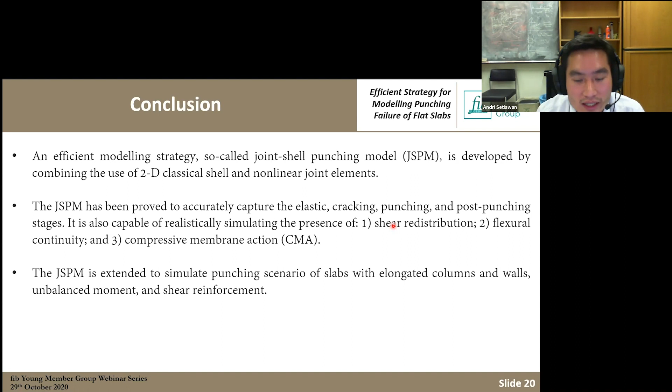We have also extended the model so it can handle punching of slabs with elongated columns and walls, slabs with unbalanced moment, monotonic and cyclic, and slabs with shear reinforcement. So we have, let's say, covered many practical design scenarios.

And lastly, in the previous slide, we also confirmed the accuracy of the model and the variation, which is very nice. And of course, the most important thing, because there is an 'efficient' word that we are putting there.

Yes, we proved that the model is more efficient and requires significantly less computation time than the 3D solid analysis. So the goal is to be able to use this model to analyze a full-scale building in a more efficient way. So that's all.

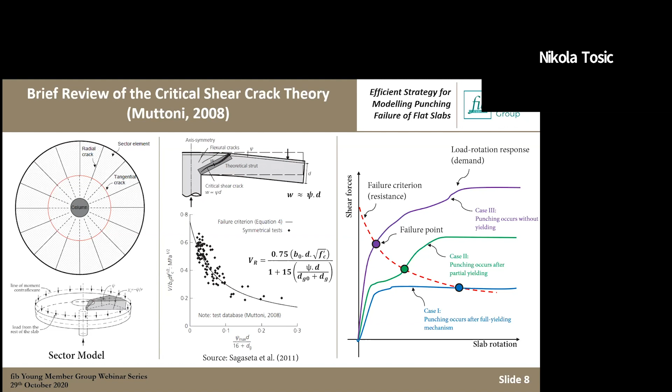Which is nice, I really appreciate the discussion here. Yes, I have one more question. I'm waiting for my time again.

My question was about the layers of your 2D element. I think it is not the common plate finite element, I think it is a layer element. Yes, it is. And what kind of layers does it consist of? And what about reinforcement, how do we model reinforcement in your layer element? Thank you very much.

The shell itself is called a nonlinear layered shell. The difference between this and a conventional shell is that you discretize the shell into several layers, and each layer represents a plane stress element with 2 by 2 Gauss points. To get the moment, shear, axial force and everything, you integrate the stress from each Gauss point on each layer through the thickness to get the external force, moment, and shear.

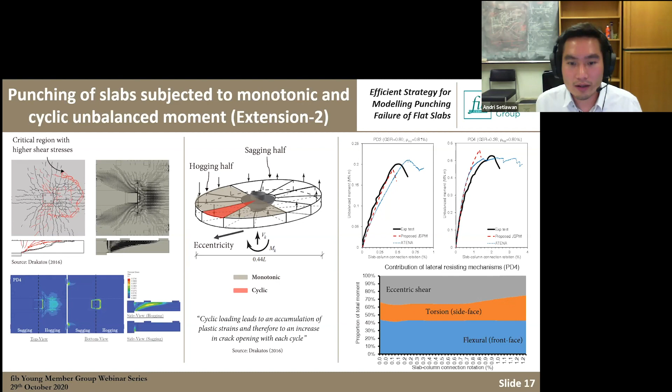Understood. Can we model it when we have only one layer of reinforcement? Yes, you can, but it's a smeared approach. For example, if you have different spacing of reinforcement, you need different cross-section properties for that, because it's not a discrete model, so different spacings need to be classified as different section properties. Okay, I understand.